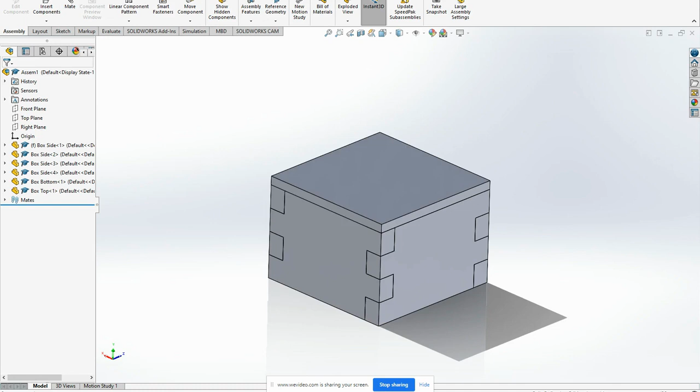All right, so to start with, after I've taken all the pieces from my box into an assembly and put everything together, I need to go into SolidWorks and start a drawing. So as I go new, the option I want is drawing.

As this comes up, there's a whole different bunch of layouts I can pick. Make sure you've unchecked this box, because if you only show the standard format, the format I created for you will not show up. When we uncheck that, at the very bottom you should have this one called Laser Engraver. It's a custom sheet size with no title block, the size of the whole platform inside the Laser Engraver. So you will not be using this much space.

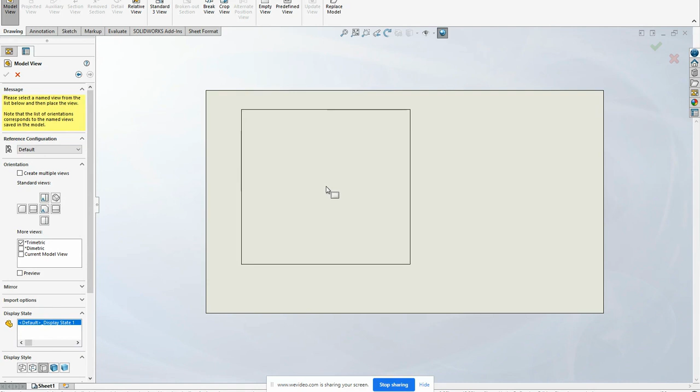In fact, you'd like to keep it as tight as you can in the upper left-hand corner. Now, if you have your parts open, they will show in the open documents here, and you'll be able to just bring them in. So I'm going to click on my box side, double click to bring it in, and set it down. And for whatever reason it wants to give me an isometric view, that's not what I want.

I probably want a front view. Some of the other ones you may need a top view. It also wants to come in huge, double size. So I'm going to come down to the very bottom here and change the sheet scale to 1:1 so that everything will come in the right size. If I change it just there, I'll be able to bring these in the right size.

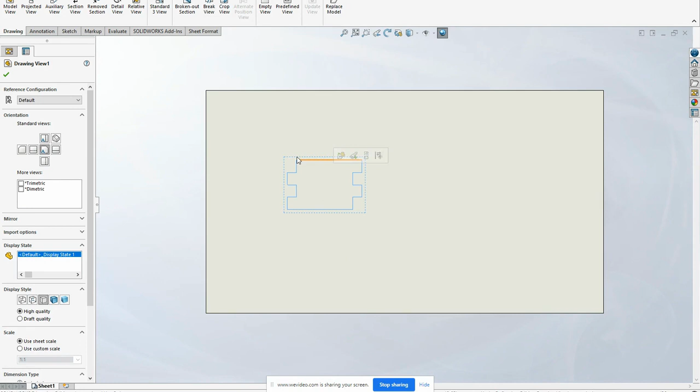So I can bring this in, and now I can put it up there where it goes. Unfortunately, it doesn't usually let me duplicate the view, so we just click Model View again, box side again, bring it in, and again we make it use the sheet scale, and then we'll bring this in.

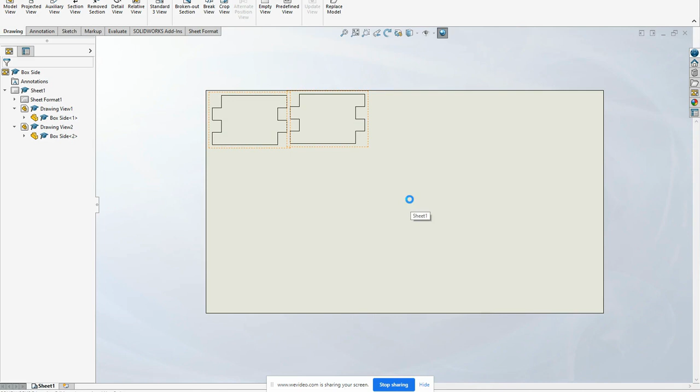Now, while you can see like, oh, I could puzzle piece these together, we really can't, because as we cut, we're going to lose some to sawdust. All right, so we're going to go ahead and do those there. Actually, I do think if I highlight stuff, I can copy and paste. I can. So I'm just going to copy and paste those two.

Now I've got 4 sides. Even where you think, oh, I'll just overlap them - no, do not overlap them. Okay, put them down like that.

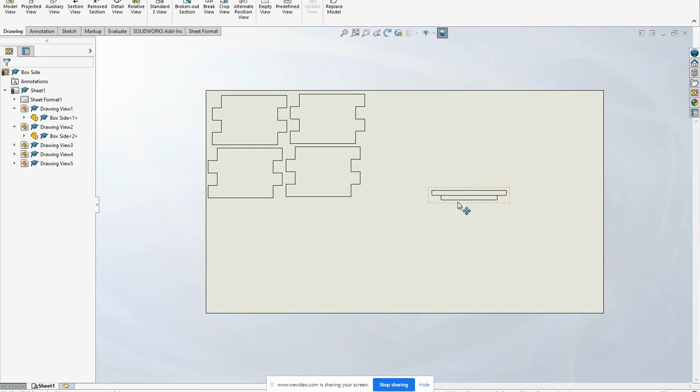All right, so the next ones I want to bring in, I'm going to bring in my box top. Double click to bring it in. It guessed what I wanted and gave me a 1:1 front view, which is excellent, but I don't want that. I actually, for this one, want the bottom view because I want to be able to see that square where I cut it out.

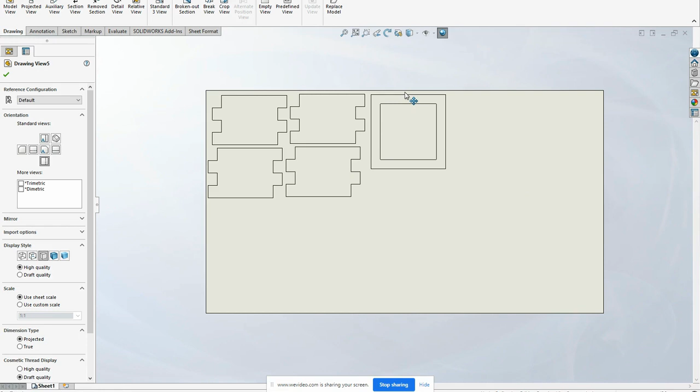Because that's really the line I'm going to want, since I'm going to basically cut it not all the way through, about halfway through up to this line. So I'm going to go ahead and put that up here.

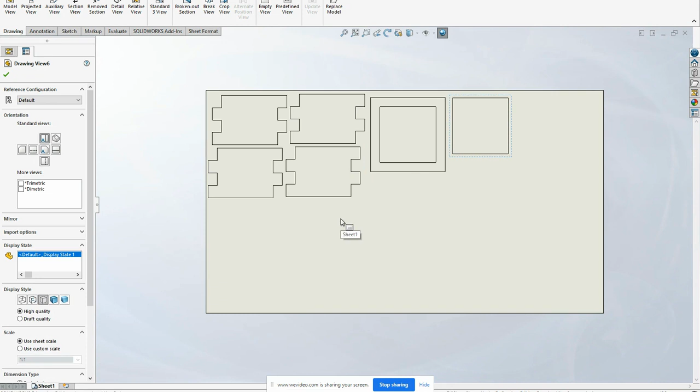And then additionally, one more model view, the box bottom. And it again gave me the ISO. I'm going to click either a top or a bottom view, because for this piece it would be the same either way. And if you find a better way that you can arrange your pieces so that it's the most efficient possible, that's great. But basically, this is a way that you can arrange them.

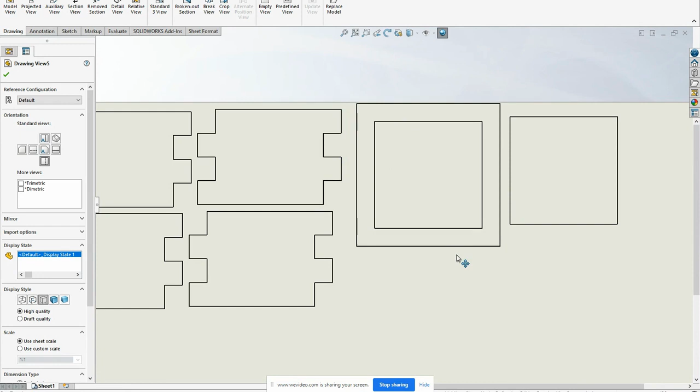So I will have a little bit of scrap there. Like I said, I can maybe mess with it. Just understand that this shows you 18 inches, but the board itself is only 11.5 wide. So if there is a way to kind of maneuver some of these around, you might be able to do that. In fact, I do think I might be able to actually take this up closer to the edge, and then I can bring this around, and that should be okay.

I can do some measuring and all that sort of stuff, but that should actually be fine. Once I do this, I need to save it.

What I would suggest is that you save it normally as just box, or wooden box, or whatever you want to do.

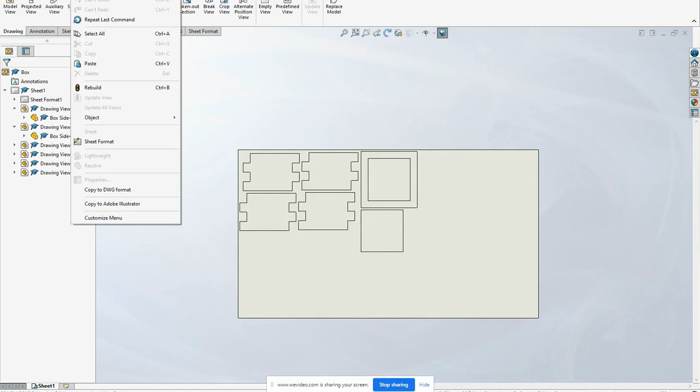Then I would suggest that you also do File and Save As, and change the format to DXF. DXF is what you need. Go ahead and save that, it saves it as the DXF.

The next thing I'm going to do is open CorelDraw. When I open CorelDraw, I'm going to select New from Template. I put it under the advertisements category so it comes up automatically, but you're going to pick the laser engraver template. What it does is give you one that's the size of the whole bed inside the laser engraver.

I'm going to go File and Import, then go wherever I saved my files - Engineering Tech 2, wooden box - and grab that DXF file and import it. I'm going to leave all the options there, put it in the upper corner, okay, and here I am.

The nice part is I should be able to now select all the lines, come down in the bottom to the line tool, click on the color, double click I think.

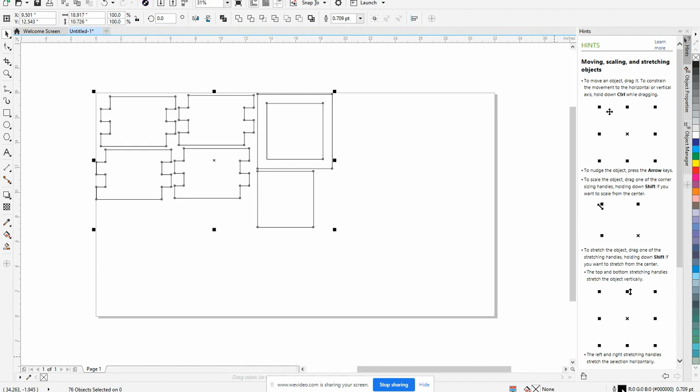Now when I go to pick the color, what you want to do is come over to the palettes and click Show Color Names. The reason you want to do that is if you take this all the way near the top, you'll notice they have some standard named colors.

Black tells the laser engraver to engrave. The grayscale gets you lighter lines. But then you're going to come down and there's some important colors, blue and red.

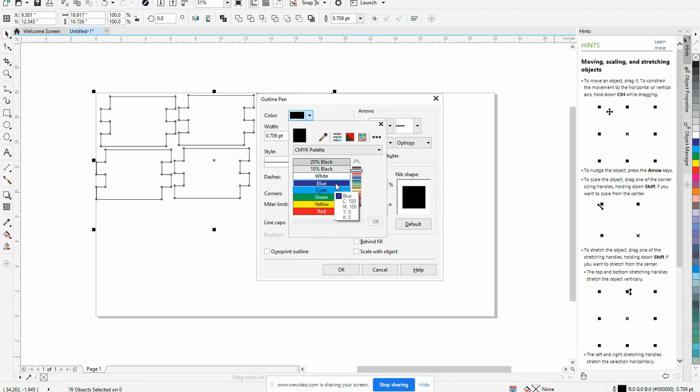Blue will do what's called vector engraving. So it's still engraving, still moving fast, but it will then follow the lines. So we want all of those to be blue lines - pick the color blue.

And then the other thing is we want the width of our lines to be hairline. So make those two changes for everything. At this point, it's going to vector engrave, so very quickly engrave all of those things.

Additionally, you should use the text tool. I won't make you watch me do this, but you should use the text tool to put your first and last name, the term, and your block number, so 3A in our case, on the bottom somewhere. It does not need to be huge, it can be small, so it's insignificant.

And if you would like to put anything decorative on the various sides, you can do that as well. If you wanted to put it on the top, we are in a bit of a predicament because I'm showing the bottom of this. So what you would have to do is show the top, and understand that you're going to have to cut that joint without a guideline if you really want to engrave on the top of the lid. Otherwise, this face that we're looking at will be towards the inside.

Once this is done, I want you to save this. And as you save it, please put it as your block number - 3A, or your block number - dash, and then your last name, and then another dash, and box is fine as an abbreviation for this project.

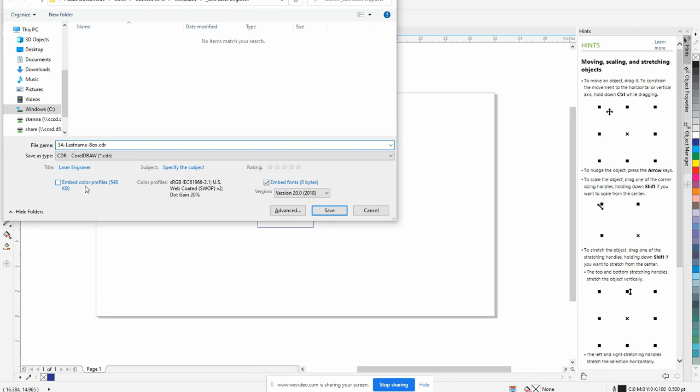But save it this way right now, because yes, you're saving it under your folder in the same place. But later on, we will also move this to a public folder where we'll be able to access it on the laser engraver.